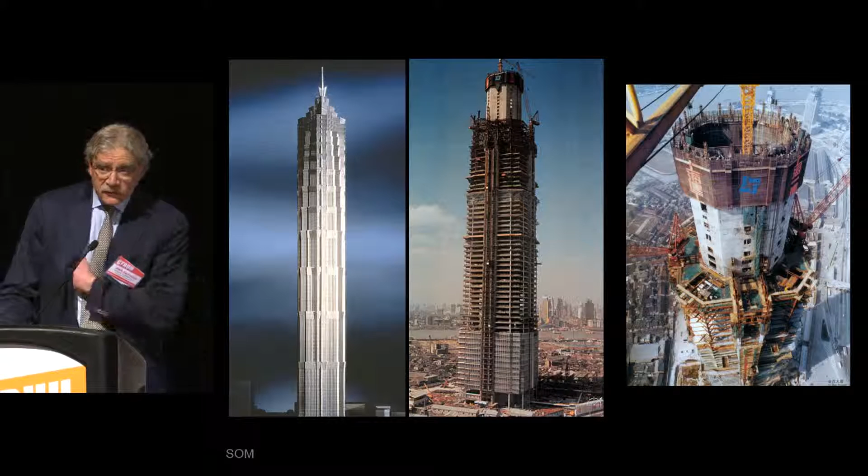This idea started here, Jinmao, a complicated building, but it had some pretty simple concepts: that we could build a building that had a system that connected the core of the building to the outside at 3 levels along the height of the building with these very large trusses, outrigger trusses. You've heard of this many, many times since, but at the time that we were developing this, there were significant challenges. Most importantly, we wanted to build this building from the bottom up.

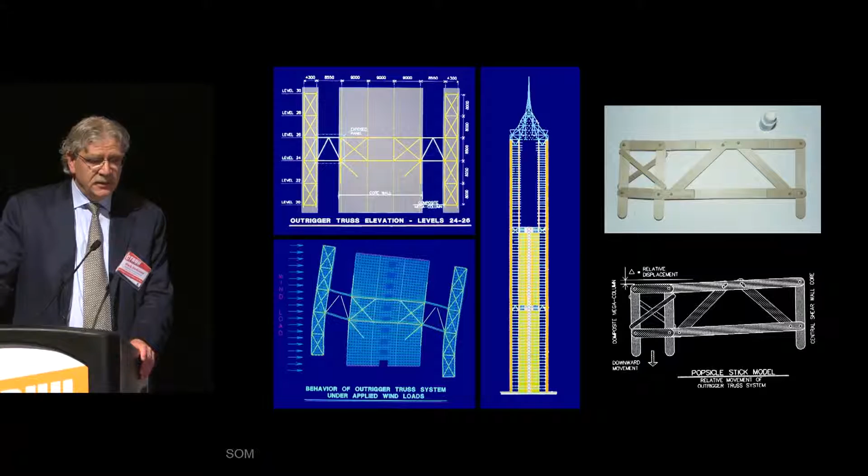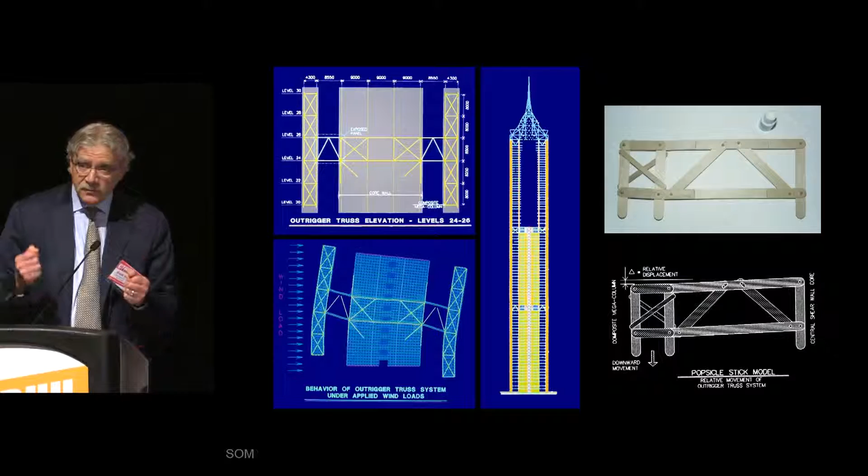And in doing that, the core and the columns moved much differently under creep, shrinkage, and elastic shortening. So we introduced pins into the system to allow these trusses to move freely during construction, not adding additional stresses to the trusses. And we did it by using these really simple principles of statics and allowing mechanisms to be created by the use of pins in circular holes and slots.

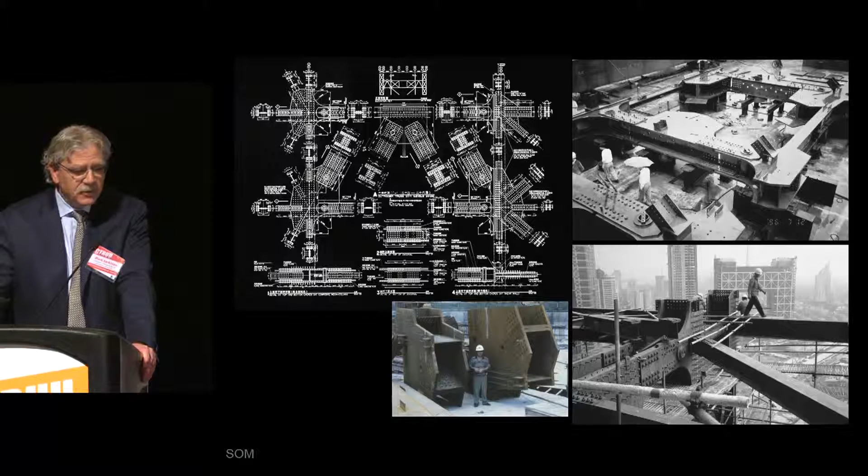Those simple ideas turned into working drawings, fabrication of the components. You get a sense of scale with the man standing next to one of the connections of one of the trusses for these outriggers. Building's pretty successful. Many of you have been here. We've had conferences there. You can stay in the Grand Hyatt. We're really proud of what went into the building to make this building happen.

And lately, people are having some fun with this. Rupa and I are not going to be doing this, by the way. This is the Jinmao Skywalk that was recently opened. So if you go to Shanghai, I'm not sure if we encourage you to try this, but anyway, there's an option to try this if you'd like to at this building.

We've seen some behavior that we'd like to learn from in Kobe in the mid-90s. We had some significant damage to buildings, mid-height collapses, lack of ductility, lack of natural behavior. So we wonder about what is it that influences us in design? And sometimes it's not tall buildings.

Sometimes it's indigenous architecture. The Isle of Chiloé, I visited this place, and I found that these churches that were built in the early 1900s survived the great Chilean earthquake of 1960. And I was convinced they survived because of these wood dowels. Friction fit connections that didn't use mechanical fasteners, that were fixed for most of the building's life, but when the demand got quite high, they either rotated or slid. They dissipated energy and they protected the building.

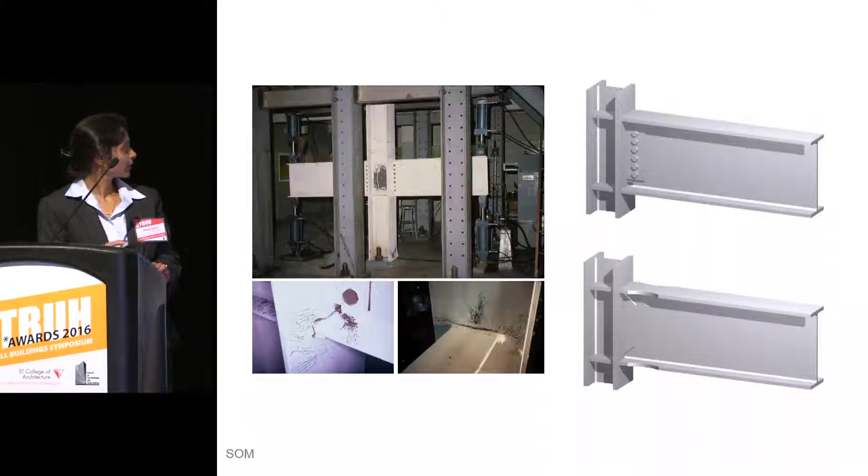So joints in buildings are just like the joints in our own human body. During a seismic event, there's a high demand on the beam column joint, which means it wants to rotate, just like a shoulder joint that we have. In a conventional moment frame, this rotation takes place with yielding of the base material in the panel zone, or in a designated zone in a reduced beam section.

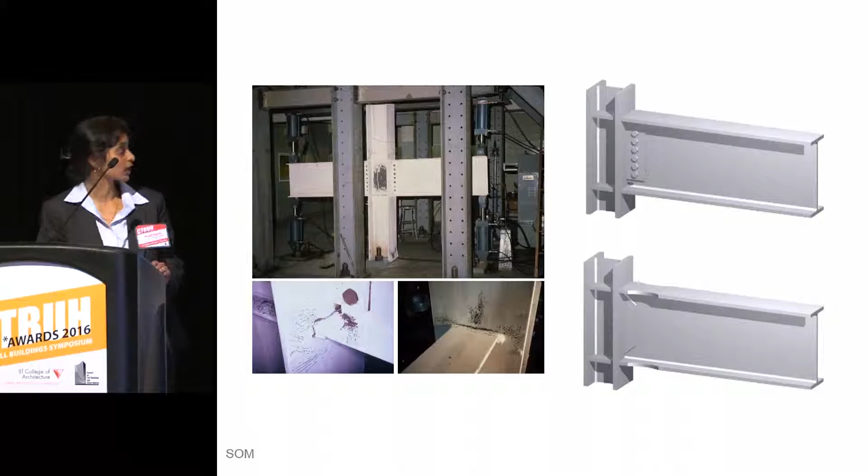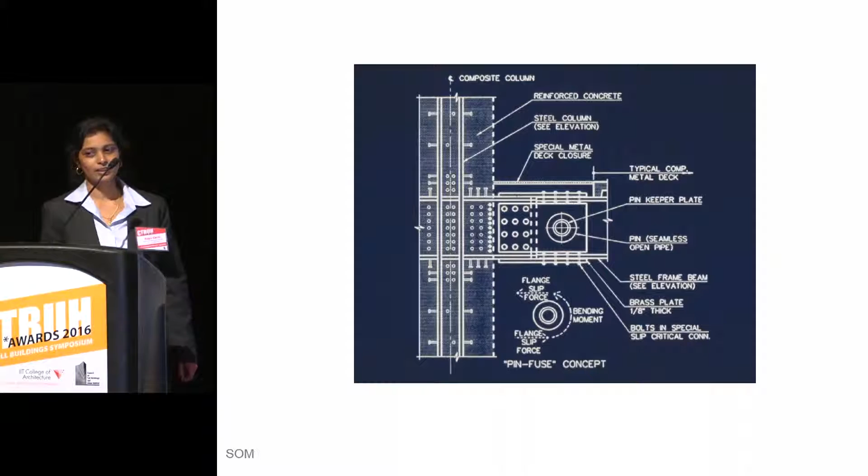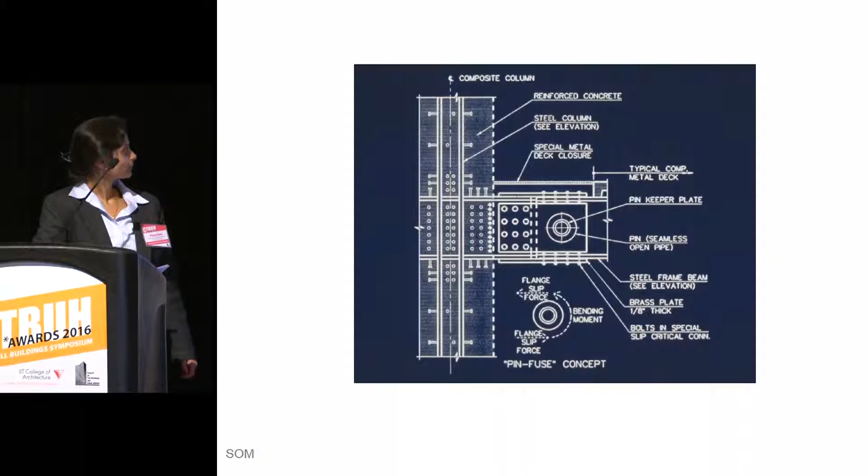And this was the first initial concept, for which Mark almost got fired because he placed it in the working drawings without having it tested. This concept is basically just having that moment frame beam rotate about the pin, with sliding to occur just at the top and the bottom flanges. And from there on, we have consistently tried to include this pin connection in a beam column joint in a moment frame, or at the ends of the brace for the eccentric brace frame.

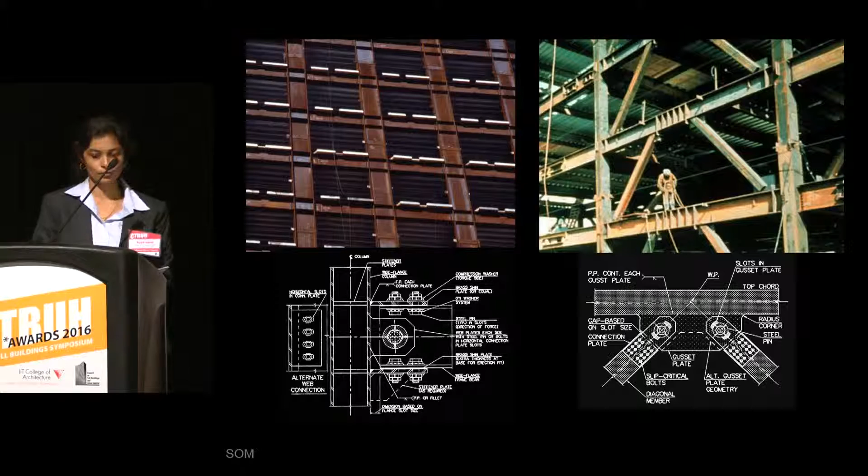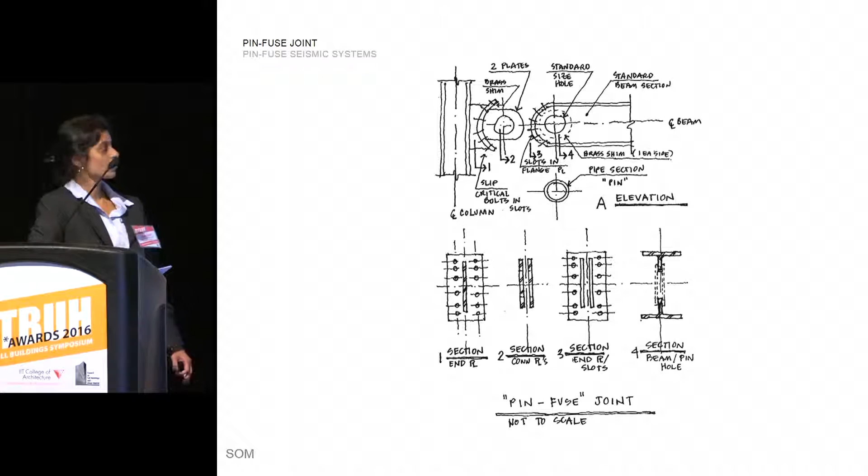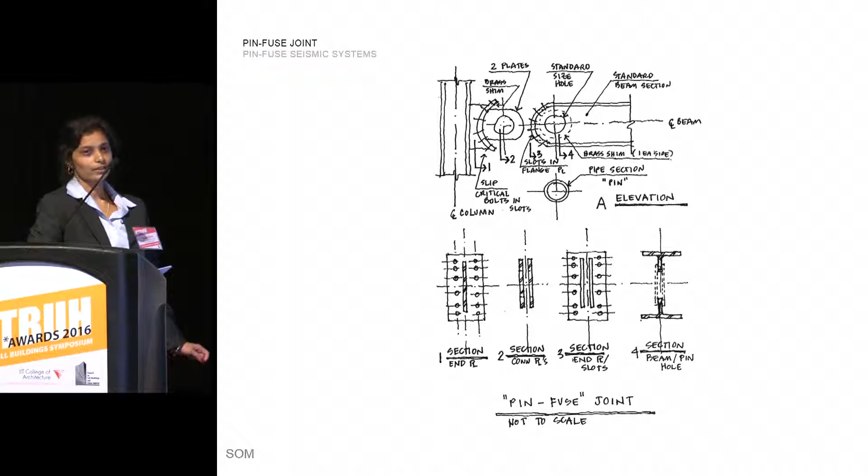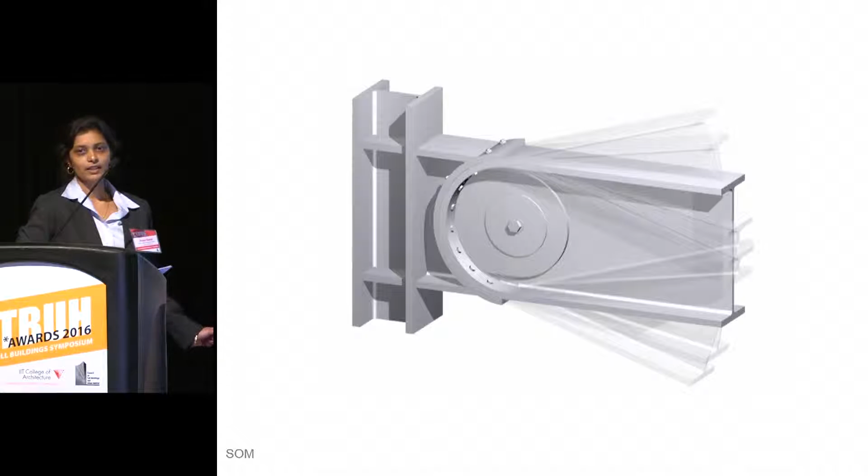But since we are trying to rotate this beam column joint about the center pin, it makes more sense to have curved surfaces. And here is the evolution of the design, where we have curved plates that are clamped together by bolts, and they rotate at threshold friction. It rotates about the pin when a preset threshold friction force is exceeded. This can be easily controlled by clamping of the bolts.

To the left, we have a regular conventional moment frame; when subjected to high moment demands, it yields the base material. To the right is a pin-fuse joint, which rotates and dissipates energy through friction. It's unusual for a firm like us to go for a patent in a building system, but we did put forward our technology, and it was patented, which shows that it was the first innovation that we had created.

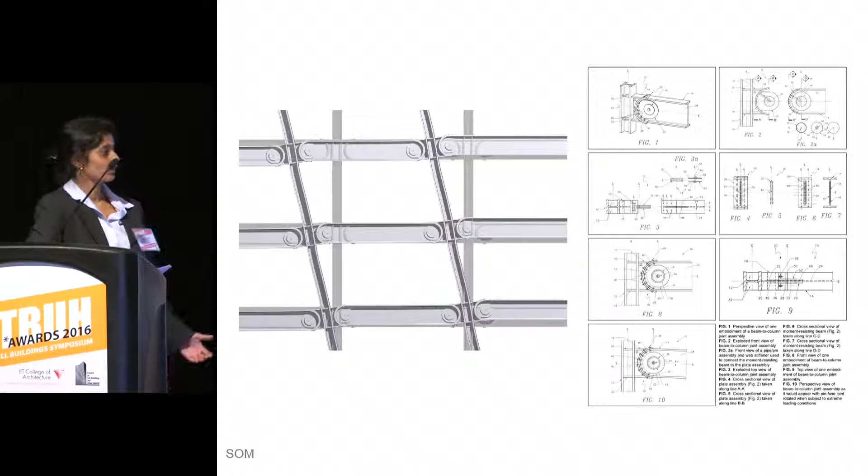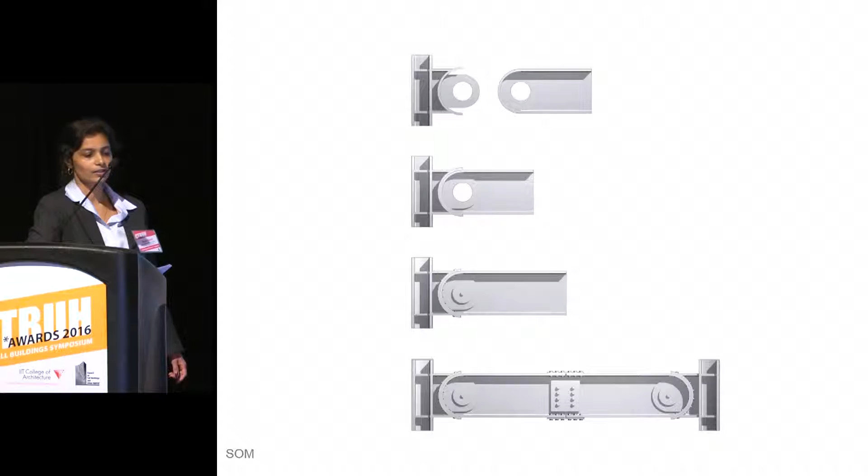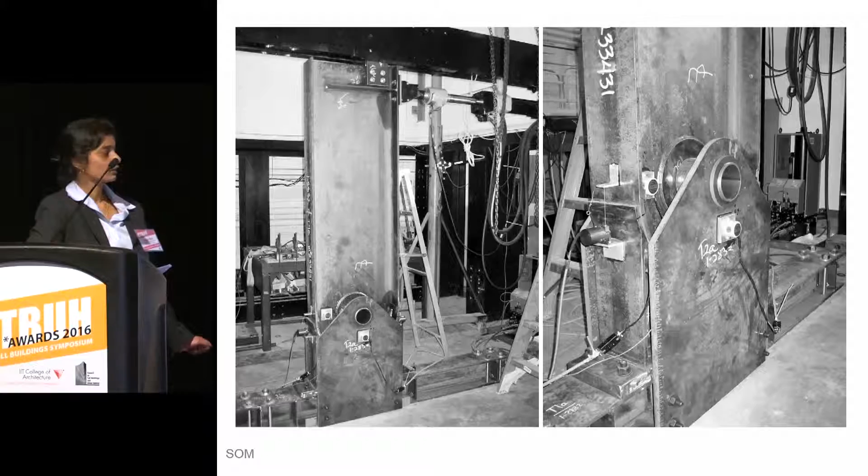So the next question is, how do we erect it in the field? And here, for this particular case, we had two halves of the beam that are brought into place and then clamped together, with the splice joint right at the center. This first initial concept was tested at Stanford University. We were looking to answer two questions. One, is the sliding coefficient of friction similar for a curved plate? Second, what value does the pin add to the system?

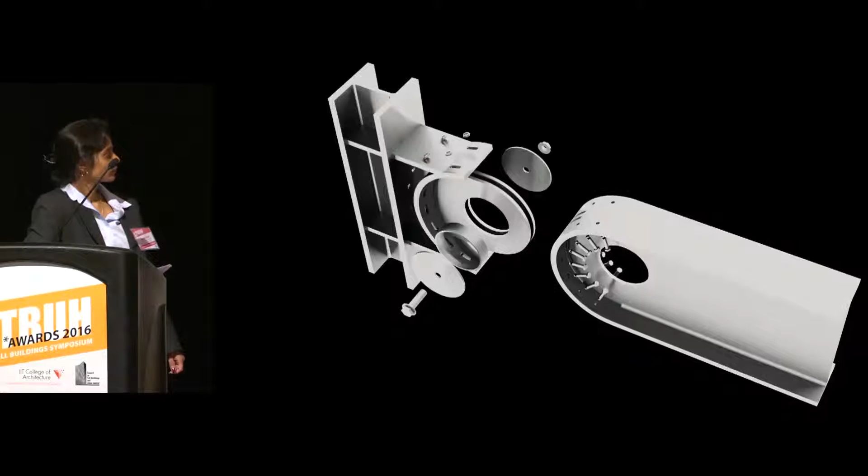After the test, we validated that the slip friction coefficient remains intact even for the curved surfaces. And the pin is really important. It helps in guiding the sliding to occur right on the curved surfaces, and it distributes the forces along the bolts that are all placed along the curved surfaces. Here's the joint. The pin comes together and is clamped with the bolt.

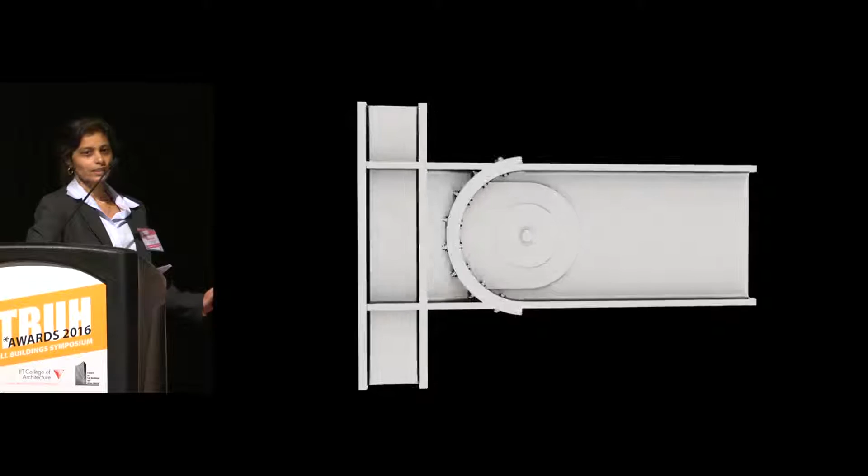And it's important to note that for a low seismic event or for a wind event, the connection is intact. Only when a particular moment, a threshold moment, is exceeded does this connection slide and dissipate energy. And this is a full frame with these beam column joints in place.

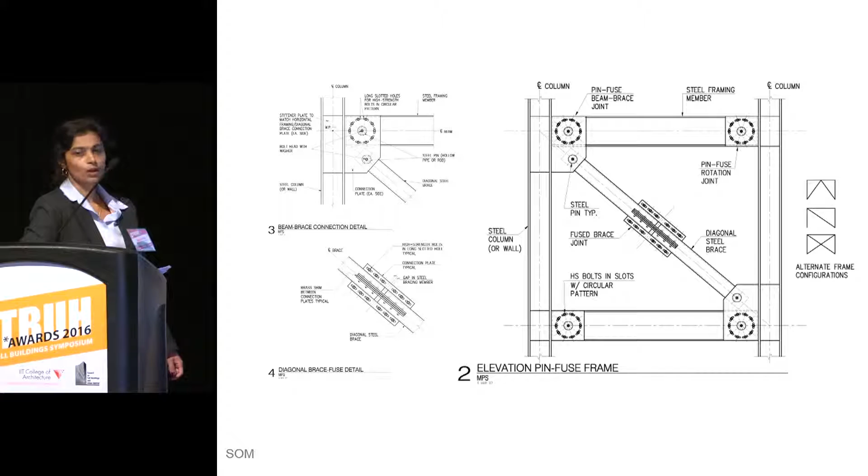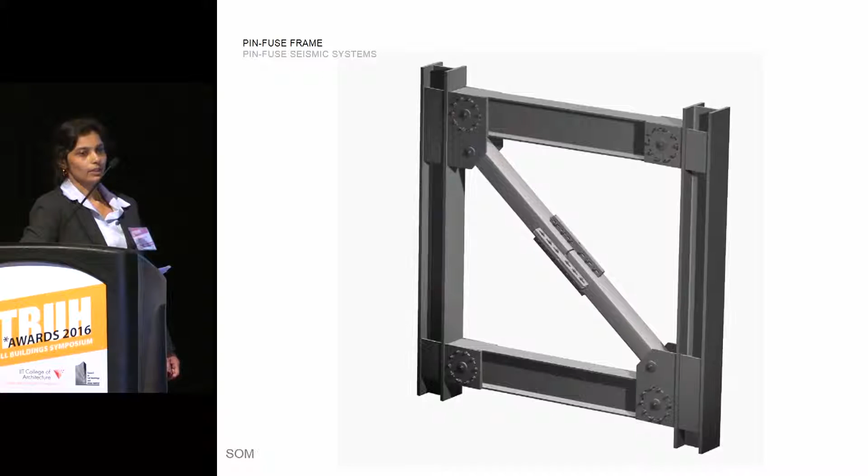So in a tall building, we know stiffness governs, and a brace plays a very important role. So here is a connection where we have included a brace slip joint within the two halves of the braces. The idea is to have the brace slip initially, and then when it locks itself to the end of the slots, it redirects the force level, and it lets the moment rotation occur at the beam column joint.

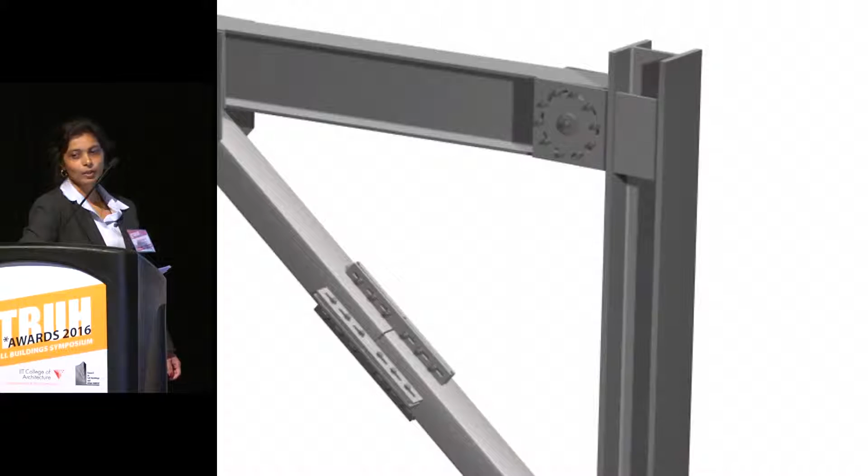And then we tested this concept again at UC San Diego. It was a full frame test. Each of the joints had been tested independently, along with the brace slip joint, and finally, we tested the whole frame. Just to let you know, for a conventional design, a frame is designed up to 4% story drift. A beam column joint is designed up to 4% story drift, but this frame was tested all the way up to 9%, twice what you would expect in a conventional moment frame.

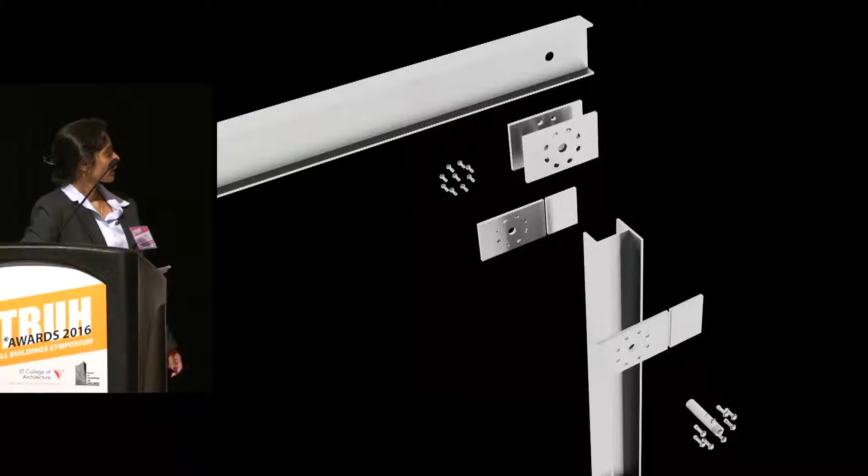And here's how it comes together. Just an important note that the slip here occurs on the vertical plane. So this system eliminates the center splice connection that we had.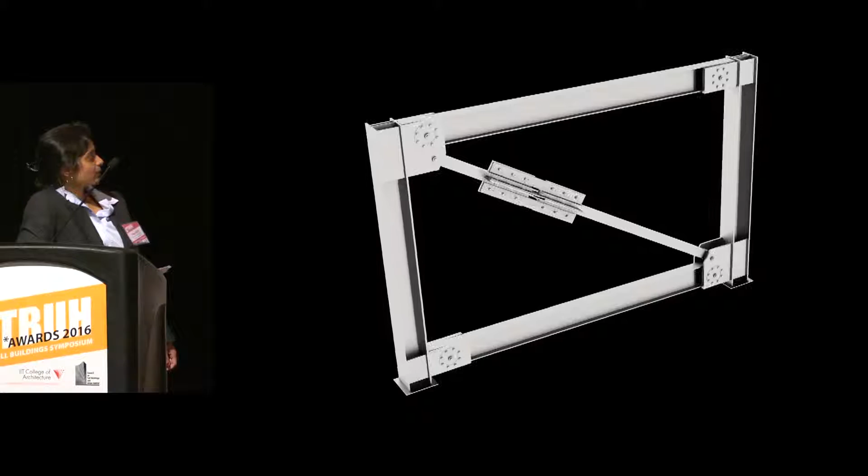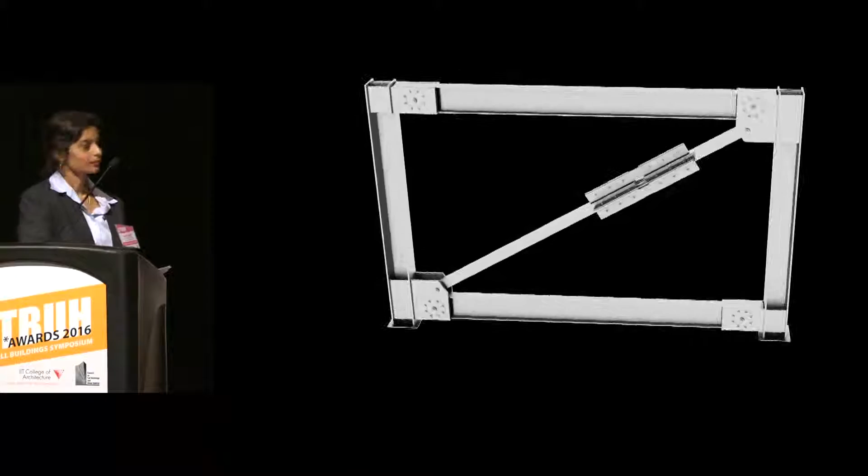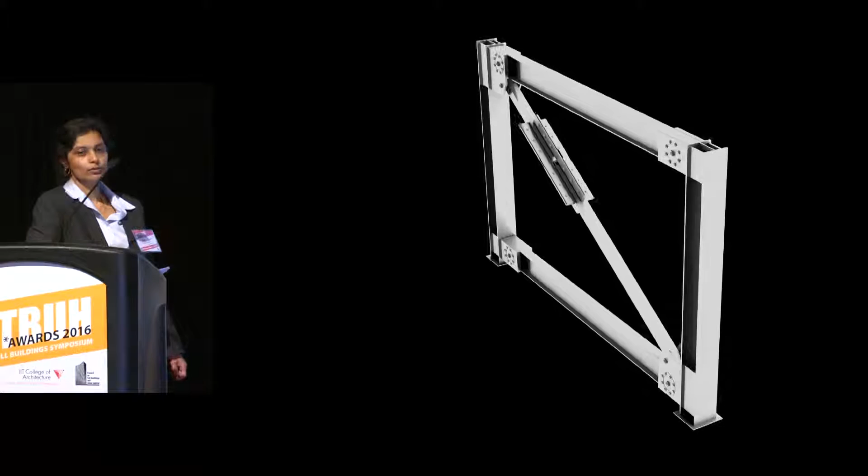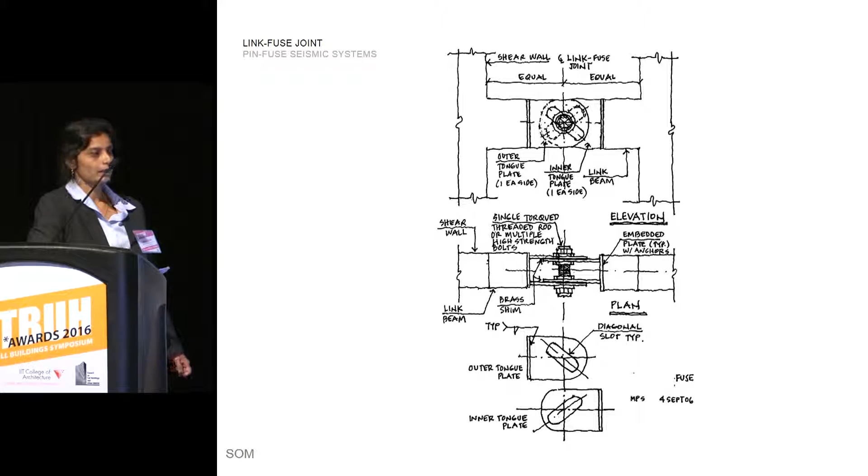Now, extending this idea into a reinforced concrete shear wall system. This is a link fuse joint where we had a prefabricated piece that connects two diagonally opposite slots through a bolt. And again, when the threshold shear force is exceeded in the link beam, they slip, and you have a joint that dissipates energy through friction.

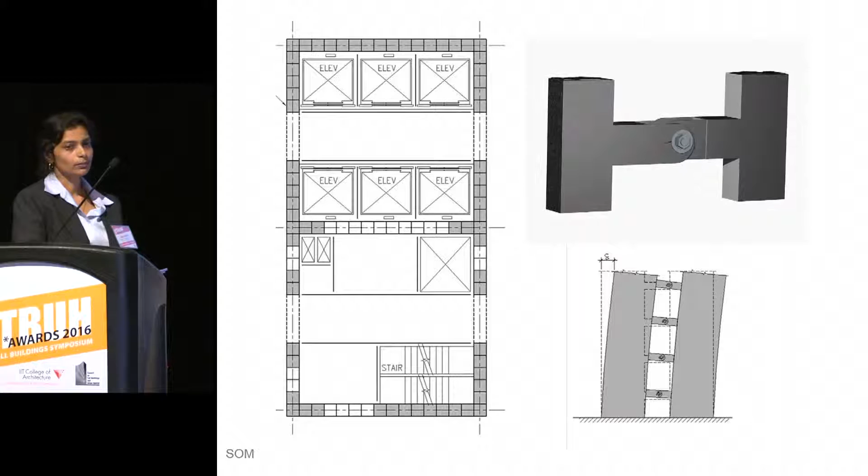Now you can include this prefabricated piece in a reinforced concrete shear wall, in a steel plate shear wall, or even in an EBF, an eccentric braced frame link. The joint ends are connected through a center bolt. And here's the joint.

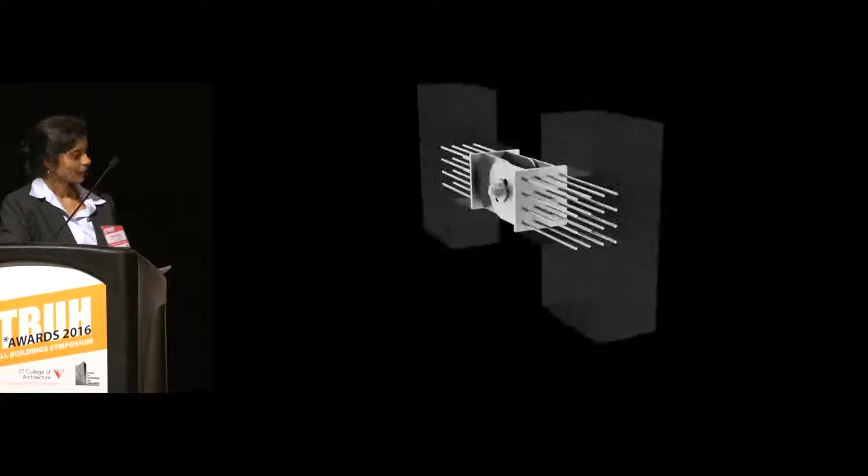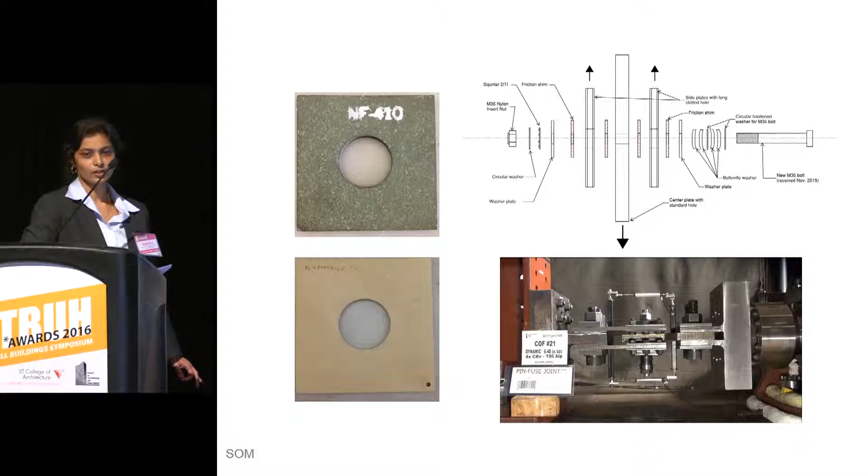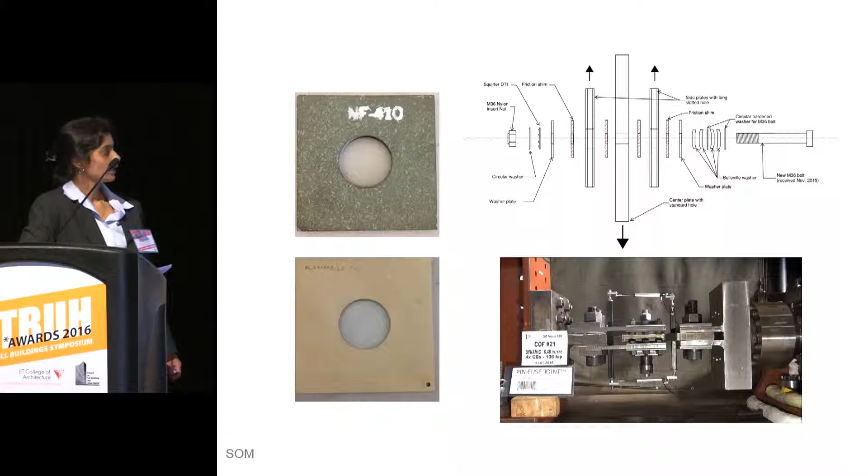So the tests were performed at Stanford as well as at UC San Diego using brass shims. And there were concerns about cold welding and electrolytic corrosion. In order to mitigate that, we came up with non-metallic shims that are used in brake lining pads in aerospace engineering. These can be easily placed in, and this was tested in the École Polytechnique lab, and we have a reliable friction coefficient with 3 levels of velocity, which are basically tied to the building period.

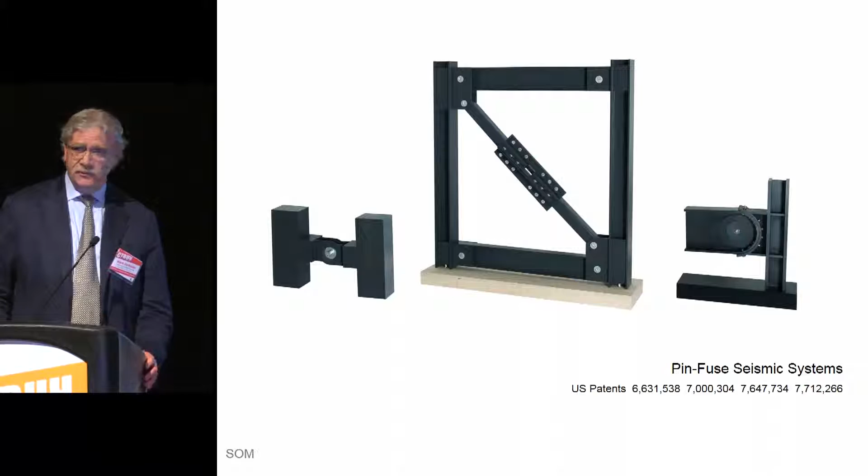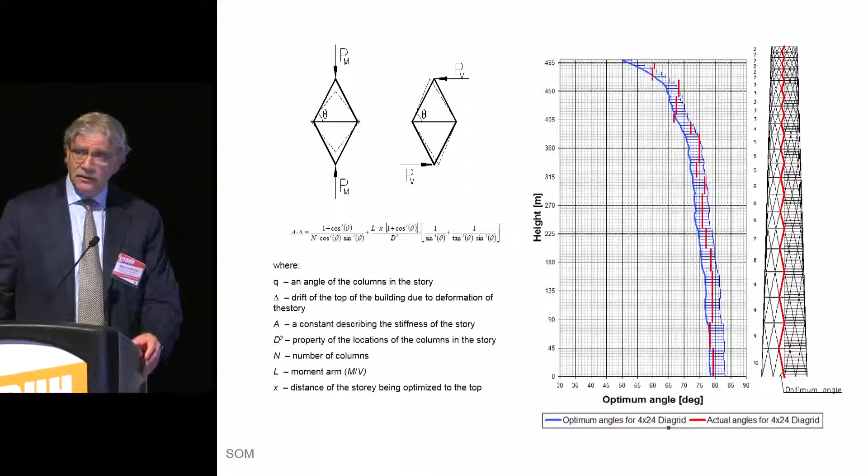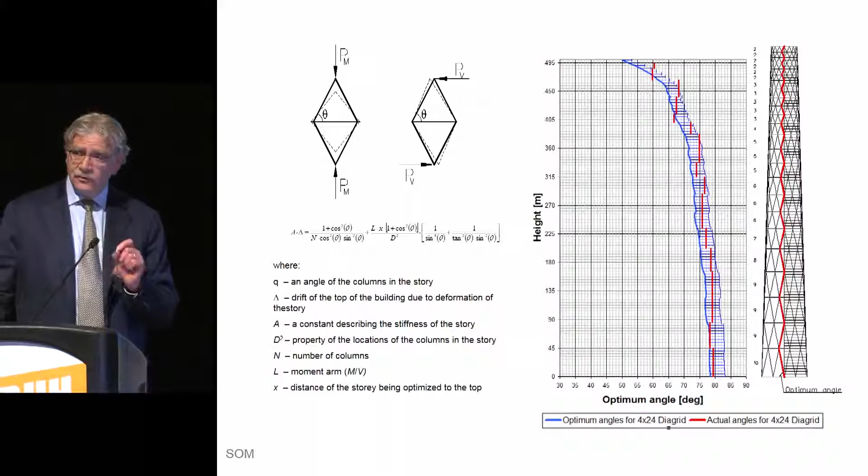What's next? So, we think that there's a broader application to cities, the idea of sensory fields, that we know when the earthquake is coming. We know when the storm is coming. And can we somehow take that information and apply it to things that we normally tuck away in drawers and don't use anymore, structural analysis models, that could in fact inform our buildings interactively: magnitude and direction of load. And perhaps we change the characteristics of joints, the materials within joints, which changes friction, which allows some joints to move more freely than others, minimizing materials, minimizing the impact on the environment. So that's what we have.

We thank the council for this award, and we look forward to development from others on pushing some of these forward and lessening the impacts that we see that are so severe to us and generate such a need.